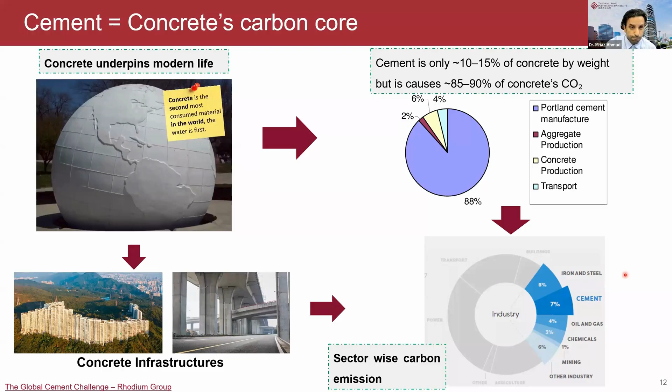Here I have a further breakdown of the carbon footprint from cement and concrete. If we look at a building level, concrete is a major contributor. And if we further zoom into just 1 cubic meter of concrete, we can see that production of concrete is majorly dominated by cement.

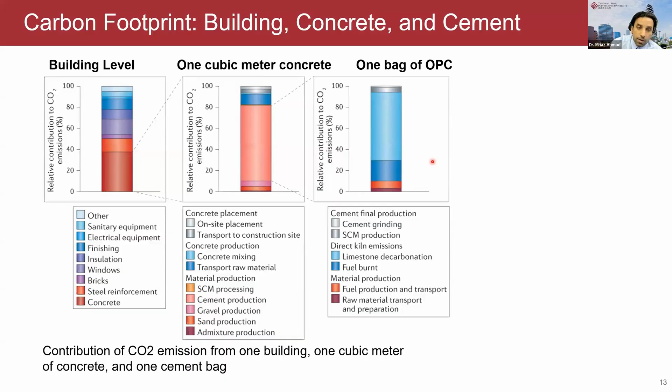And if we further magnify it to 1 bag of cement, we can see that most of the carbon emission from cement comes from calcination, heating the limestone at very high temperature, normally 1450 degrees centigrade. Overall, if we construct a room, around 30% of the carbon emission comes only from cement.

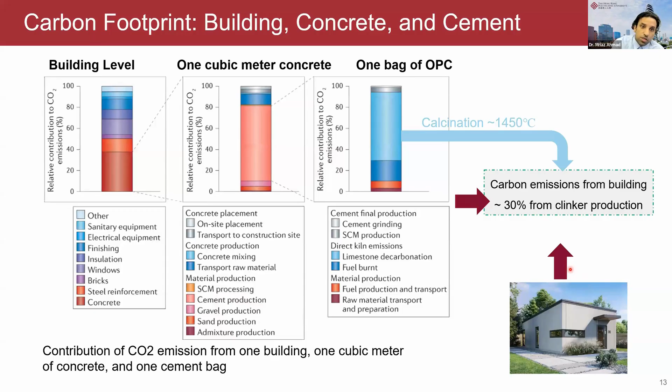Also, the cement production is still growing at a large scale, and mostly it is dominated by China. According to estimates, more than 50% of cement is produced in China alone. So without intervention, it's not very easy to reduce the direct greenhouse gas emissions from cement, and it will continue to be a problem in the future.

So if we want to meet the Paris Agreement climate goals and keep the temperature below the 1.5 degree threshold, then we need to take some actions.

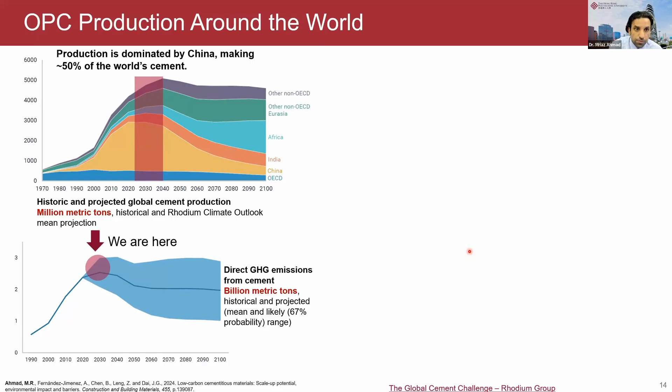So to address the issues in the cement industry, there have been various roadmaps across different regions and countries, such as GCCA and MPA, the Mineral Product Association from UK. GCCA is the Global Cement and Concrete Association. Also Europe has its own, and America and Germany, they have their own roadmaps for how they aim to reduce carbon emissions from cement.

This roadmap contains various strategies such as carbon capture, storage, and utilization. They also focus on concrete efficiency, like how to modify the design of concrete buildings so we can reduce the usage of concrete.

Other approaches are novel chemistries, low carbon cements, like we try to find alternative cementitious materials, not OPC. And another approach is clinker reduction, like we reduce the clinker factors.

Normally, if we talk about supplementary cementitious materials, we use around 10 to 20, 30%, except slags. Of course, slag can be used at a higher percentage. Besides slag, all of the other materials are limited to 10, 20, or maximum 30%.

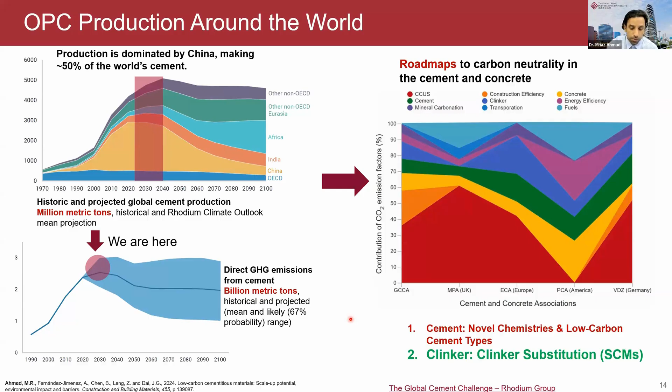So now we'll discuss this. First of all, I would like to talk about low carbon cement and clinker technologies. In the last slide, I discussed two major technologies. One of them is low carbon cement, or the novel cement chemistries. The other one is low clinker cement, like we can reduce the amount of clinker.

So I will briefly discuss a few other technologies which we can use to prepare alternative cement. Some of them include carbonatable binders, ye'elimite cements, belite-rich cement, and alkali activated materials. I'm not going to cover these today. These are different topics, but there's a significant amount of research being conducted also on these alternative cement chemistries.

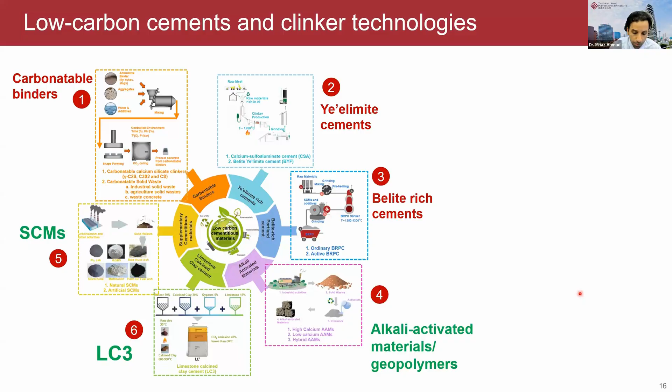Today I'll mainly be covering supplementary cementitious materials and LC3, and how we can prepare ultra low clinker cement using these two technologies.

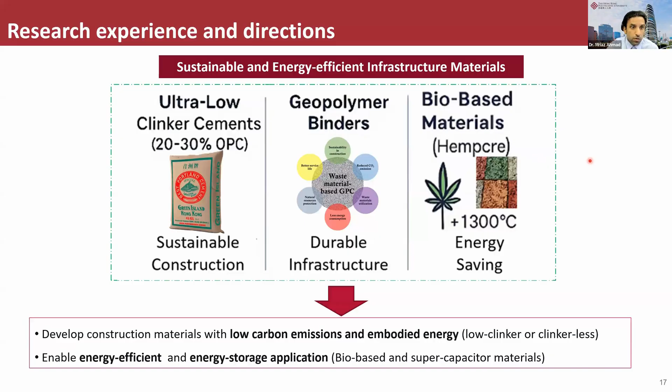About my research, I have recently developed more interest in this ultra low clinker cement, and normally I try to aim to reduce the cement content to only 20 to 30%. I also study geopolymer binders and bio-based materials, which again are not covered in today's webinar.

So what is ultra low clinker cement? Normally, if we talk about low carbon cements, we try to replace supplementary materials by 10%, 20%, or sometimes 30%. In ultra low clinker cement, we try to replace the cement content by 50% or even more.

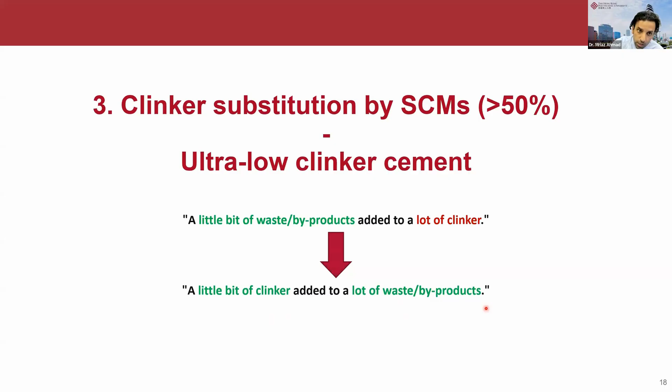So the approach is very simple. Normally what we do is use a little bit of waste or byproduct and add it to a lot of clinker. This is still, of course, a low carbon binder. But in today's webinar, what we are going to discuss is how we can add a little bit of clinker to a lot of waste or industrial byproduct, or so-called supplementary cementitious materials.

But when we replace too much clinker, we encounter several problems. This is not straightforward. There are several issues, one of them mechanical and construction side. We see very slow early strength development, delayed setting time, and workability issues.

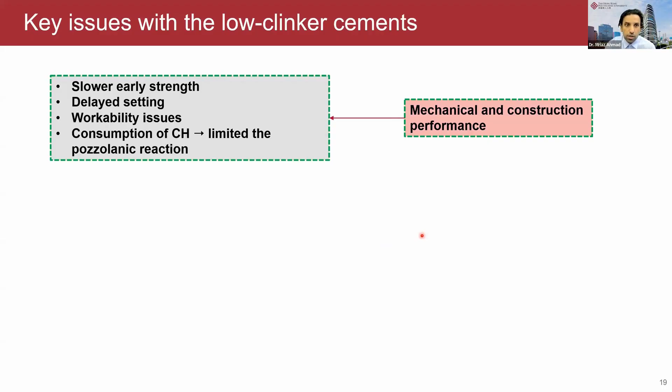This is partly because there is less cement, which generates Portlandite, responsible for the pozzolanic reaction. On the durability side, we also face issues such as when we replace a higher volume of cement with supplementary material, the cement has a very low pH. This reduced alkalinity can lead to problems such as decalcification of CSH because of natural carbonation, or it can lead to more porous structures, which can degrade the long-term durability, very important for concrete.

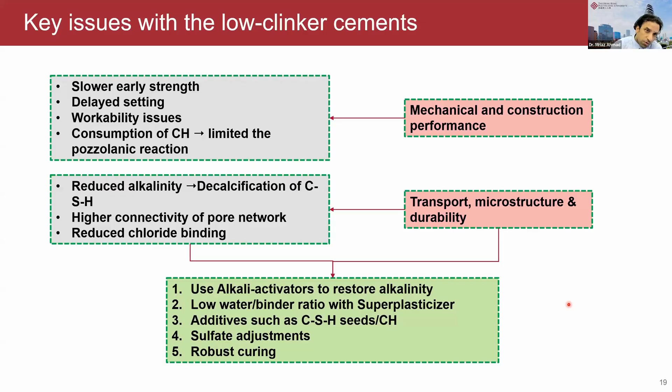My research aims to address this issue while also focusing on preparing ultra low clinker cement through different strategies such as alkaline activators, optimizing water to binder ratios, and using super plasticizer to reduce this water to binder ratio. Also using additives such as CSH seeds, calcium hydroxide, sulfate adjustment, and robust curing. These are the few techniques we can use to prepare ultra low clinker cements.

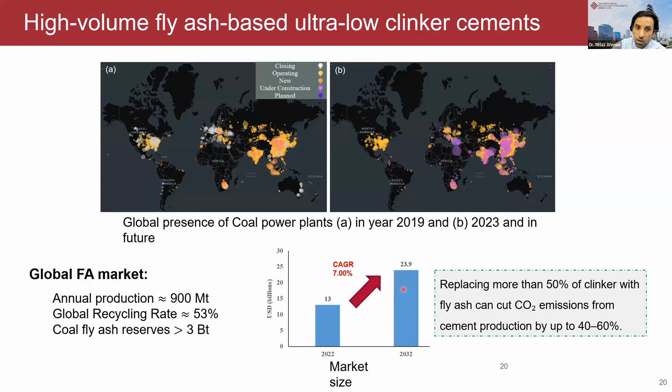So first I tried to use this fly ash to prepare the ultra low clinker cement. In this case, what we did is utilize 80 to 92% fly ash and 8 to 20% clinker only. So we developed the binder.

To make this work, we used sodium hydroxide to boost the reactivity of fly ash, and we maintained a very low water to binder ratio by adjusting the super plasticizer. The main aim was to create a denser structure, since water to binder ratio is extremely important. If we use a high water to binder ratio, after evaporation, it can lead to a porous structure.

And I adopted two curing techniques: one was curing at 20 degrees, the other was curing at 40 degrees. So what we observed is some very technical results, this was done by ICP.

What we did is we pre-dissolved the fly ash into the sodium hydroxide before mixing with the cement. You can see there is a huge boost in releasing silica and alumina. Normally at normal temperatures, if we don't use sodium hydroxide, there will be very little amount of alumina or silica to react. But if we use some amount of sodium hydroxide, it can help release a lot of reactive alumina and silica, which can react with the cement and increase the properties of the cement.

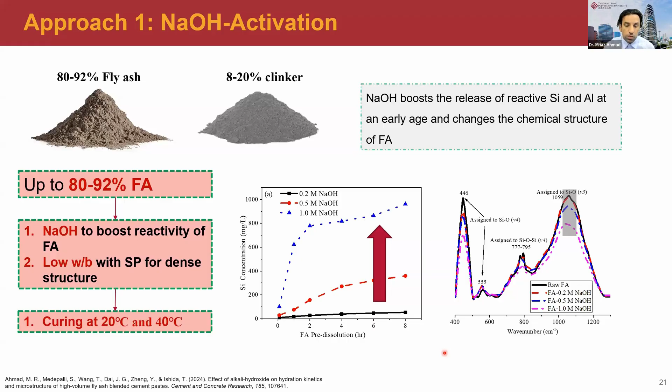This is very crucial to the ultra low clinker cement. Besides that, it can also increase the early strength. The results are quite promising according to our testing. The sodium hydroxide technique significantly increased the early strength from 1.7 megapascal to around 6 megapascal at 1 day, which is more than 3 times. It's a significant improvement in compressive strength, and by 3 days it can reach around 11 megapascal.

At 28 days, we still saw that the compressive strength was still higher, around 35 megapascal. However, the significant increase we observe is at 40 degrees centigrade. So temperature, like I mentioned before, curing is extremely important if we want to improve the properties of this ultra-low clinker cement, because it can boost the further reaction. You can see that when we use this 80% fly ash, the compressive strength can reach 60 megapascal, which is a very high strength, almost qualified for structural grade concrete.

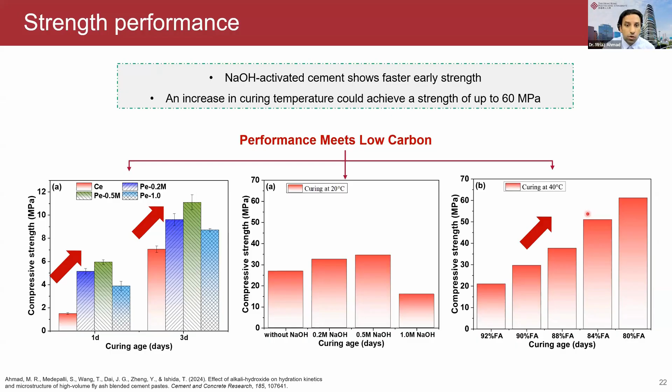So these results prove that we can achieve both low carbon and high performance concrete, even when we are using a very low amount of clinker.

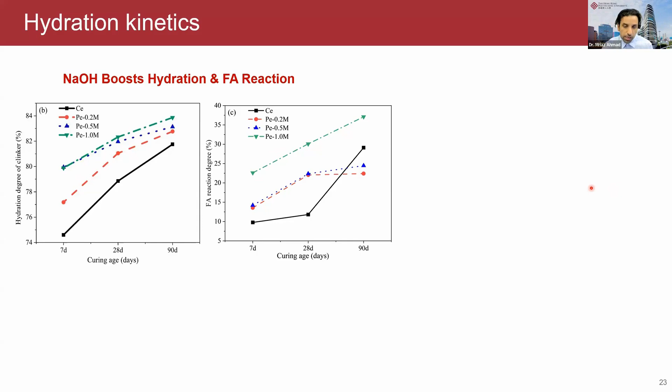So we also studied why this happens and what the fundamental changes are when we use this sodium hydroxide into the system. We observe that two things happen. First, the morphology of the main binding gel, which we can call the glue in the cement, changes a lot when we use sodium hydroxide. The other thing is it also changes the chemical composition, our so-called calcium over silica ratios.

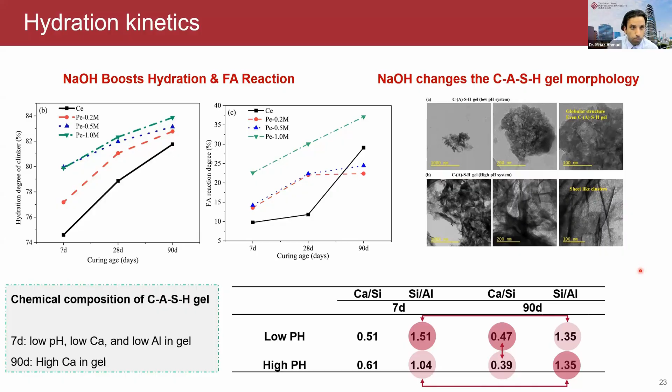So we also studied different durations, for example what happened at 7 days or very early age, what happened at 28 days, or what happened in the long term. What we see is that there are three different mechanisms which evolve.

First is the dissolution when we mix this sodium hydroxide with fly ash. There's a tremendous reaction going on, with a significant release of silica and alumina species. At 7 days, we observed two types of gels: one of them is a CASH gel, and the other one is a C-N-A-S-H gel. But with time, we saw significant changes, and this C-N-A-S-H gel changes to CASH gel.

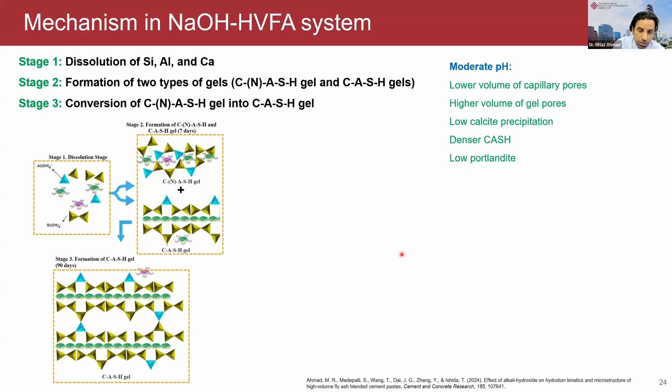We also observed that when we use a high amount of sodium hydroxide, there's a significant increase in capillary pores. So actually, using sodium hydroxide or this alkali treatment is not always beneficial. We have to very carefully optimize the optimum content of this sodium hydroxide. If you see these blue channels, they represent capillary pores, and they are much wider compared to these figures on the left side, which shows that capillary pores are much lower here.

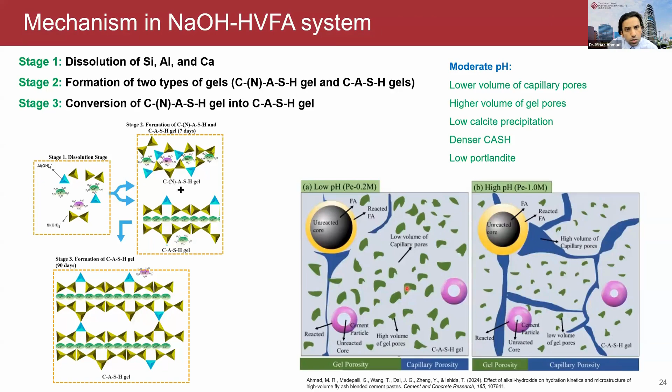So this was the first approach. Now I will be discussing the second approach.

In the second approach, we studied another promising low carbon cement system, known as the limestone calcined clay system. There's a tremendous amount of research going on for this particular binder in a significant part of the world. Particularly, this binder is already being utilized in India, also in Cuba, and in a few countries in Africa because of its lower carbon emission. Also, this binder can be significantly scaled.

Typically, when we talk about LC3, we are talking about LC3-50, which means we are replacing up to 50% of the cement with limestone and calcined clay. This cement has almost 40% lower carbon emissions.

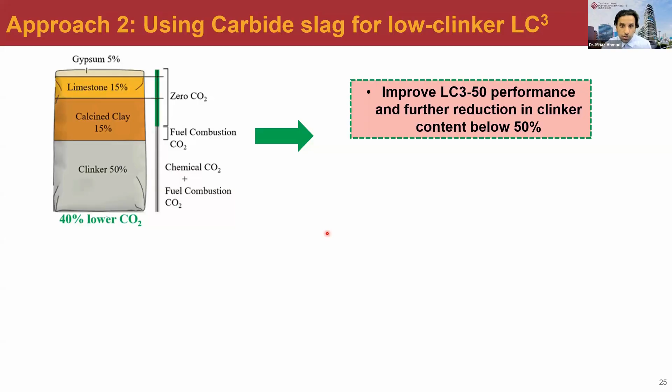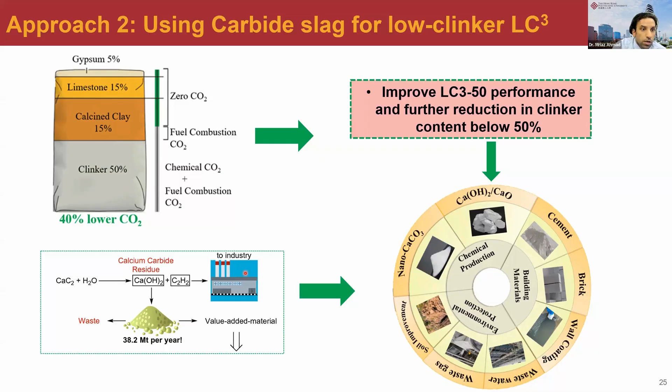So the goal of my research was to further reduce the amount of clinker in this system. The problem is that when we want to further reduce the cement, the reactivity of this calcined clay cannot be fully utilized because there is not enough or sufficient calcium hydroxide. So we tried to find some industrial waste which can supply calcium hydroxide, and we found that carbide slag is a perfect candidate.

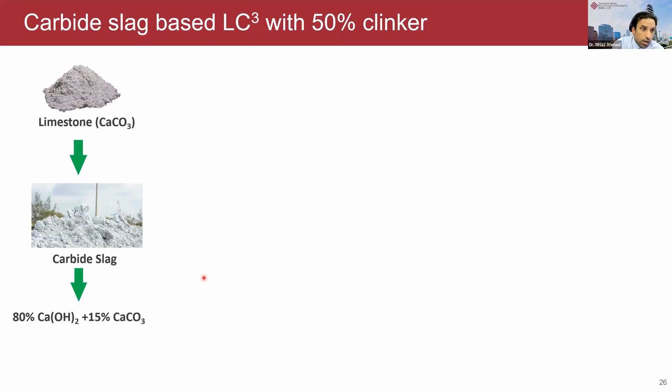This carbide slag has 80% calcium hydroxide and 15% calcium carbonate, or calcite, so it is a source of highly reactive free lime. We compared the LC3-50 with limestone against a new mix, which we call LC3-CH, because this carbide slag provides additional portlandite or calcium hydroxide. So all other mixtures are called CH.

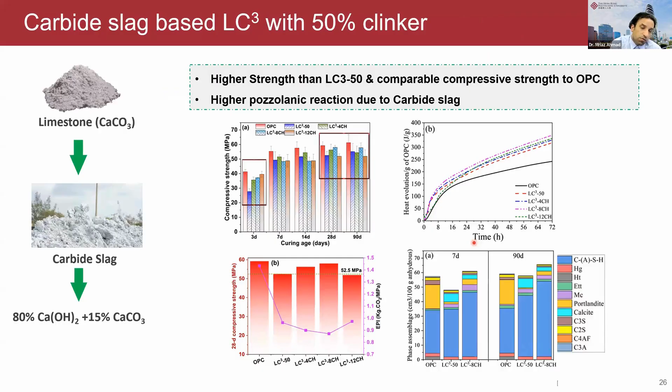That was the system when we replaced only 50% clinker. In the next approach, we created LC-Cube mixes with only 40 and 30% clinker content, and we tested two sources of carbide slag. One is just the raw carbide slag, which has a lot of calcium hydroxide. The other, we tried to calcine this calcium carbide slag to produce quicklime or calcium oxide. The idea was that this calcium oxide has very high heat during the early reaction, and it may boost the early age compressive strength.

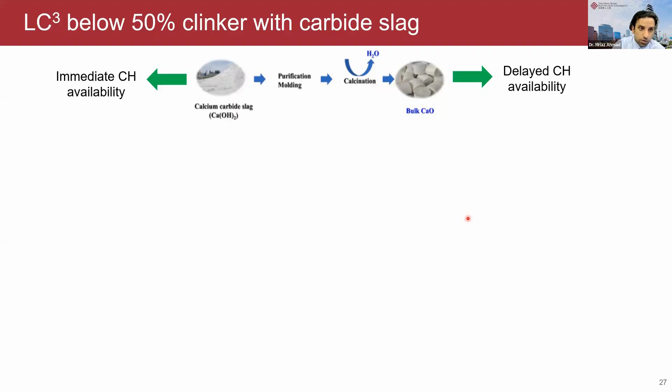The lower the EPI, the better the material. At the same time, it can maintain the same compressive strength as LC-Cube 50. Also, as compared to LC-Cube 50, it significantly improved the reaction of the system.

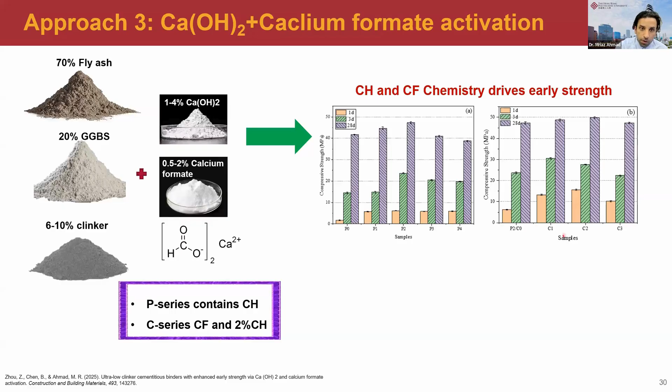So in further optimization, we added some calcium formate. We could see that at 1 day, we could achieve a compressive strength of 15.7 megapascal, which is a significant boost, given that the clinker content is only in the range of 6%.

So why and how it happens, we further tried to study the different mechanisms. We propose 3 different mechanisms which happen in this kind of system. The first one is that the calcium formate aggressively accelerates the clinker hydration, and increases the hydration of the clinker at a very early age.

The second mechanism is a substantial increase in the volume of the CSH gel, because we also have 20% slag, calcium hydroxide, and calcium formate. By improving the hydration of the clinker, this system can also increase the reaction of supplementary materials such as slag and fly ash, because there's a sufficient amount of calcium hydroxide available.

The third and last phenomenon we observed is a high volume of calcium carbonate, or in situ carbonation, which forms very tiny calcite particles that can fill the pores and densify the microstructure. These observations were confirmed with TGA and XRD. At 28 days, compared to the control mixture, there's a huge increase in the intensity of the calcite mineral.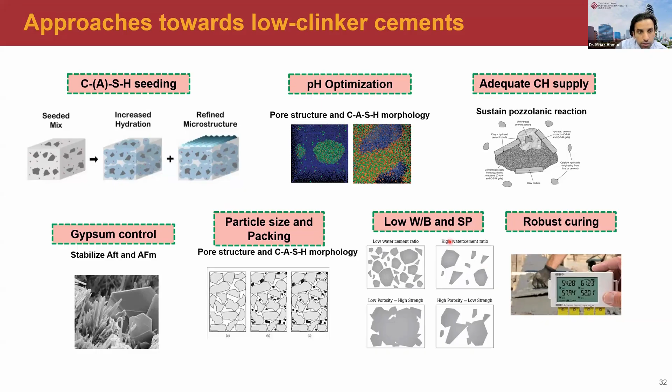However, we did not cover this topic in our recent research. We also did not study CASH seeding, but these are techniques reported in the literature to boost strength—they have not yet been applied to study ultra low clinker cement. Not a lot of research is available. We also studied low carbon, low water-to-binder ratio, and robust curing. These are the different techniques we can utilize to produce ultra low clinker cement.

A critical question, however, is whether we have enough supplementary cementitious materials for the global transition. The good news is that there is a vast and diverse range of potential supplementary materials.

There's also a huge amount of other supplementary materials such as phosphogypsum, waste concrete, mine tailings, and coal gangue. The volume of generation of these industrial byproducts is actually much more than the requirement of the cement industry, so it just needs a lot of research.

Of course, there's already a lot of research going on, which means we can utilize these large volumes of supplementary materials available to produce this kind of low clinker cement. However, not every material is as good as fly ash and slag, so there's a significant need to invest in research to study the properties of these supplementary cementitious materials.

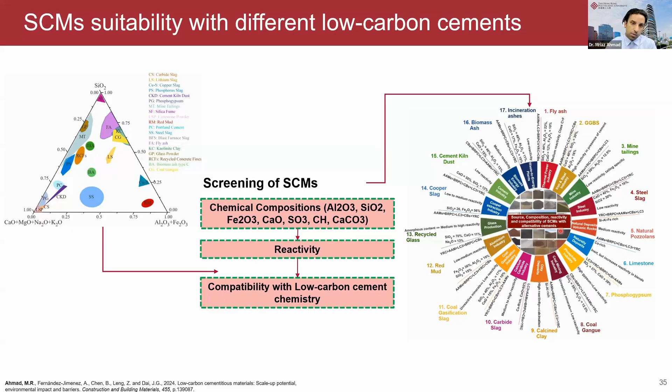Of course, some information still needs to be upgraded, because supplementary cementitious materials, even when from different sources, may still have different reactivity and different chemical composition. So this is still a very preliminary guideline, but I think using just this simple picture we can very quickly determine which kind of material is suitable for which kind of binder.

Supplementary blended cement and LC3 are commercially ready and being used in several parts of the world, and they offer significant savings depending on the replacement level. In our study we go up to 80, even more than 90 percent, meaning it can reduce not only cost but also environmental or carbon emissions.

However, there are significant technical barriers. Especially for ultra low clinker cement, it's not a wide practice around the world at this moment. Alkali activated materials and novel clinkers such as CSA have a significant amount of research ongoing, and in a few countries they're already being used. Very recently the UK approved their standard for alkali activated materials, and it's also in application in Australia. But these materials face greater challenges, not only with cost but also with supply chains, and these new binders lack long-term data and standards, which is very important.

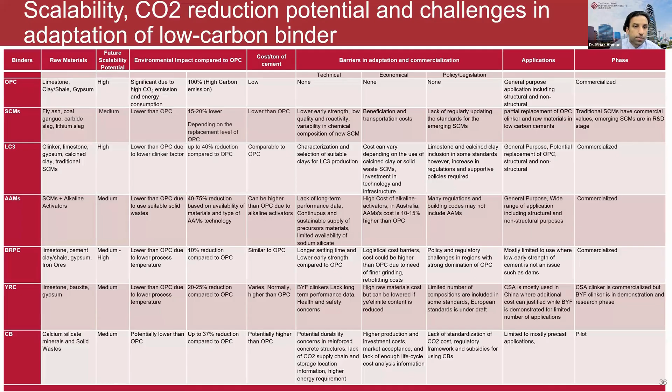With that, I will conclude today's webinar, and thank you very much for your attention. I will be happy to take any questions.

From YC Lam, there are two questions. The first one: comparing sodium hydroxide, fly ash, and GGBS, which one comes with the required early and ultimate strength, at lowest cost and highest quality control, in terms of source and quality of additives that may affect it? Thank you.

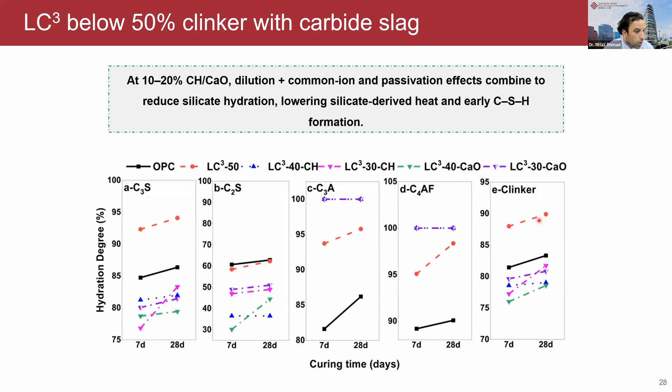Sorry, can you mention the slide? Mr. White, can you repeat the question again, otherwise? Okay—comparing sodium hydroxide, fly ash, and GGBS, which one comes with required early and ultimate strength at lowest cost and highest quality control?

Yeah, okay, so first of all, GGBS or slag provides early strength. However, GGBS I assume is more expensive than fly ash, and the reaction rate of fly ash is much slower. So actually there has to be a balance—if we want to achieve high early strength but also be low cost effective, I think we need to use a blend of these materials, which is actually what we have done, especially when using calcium formate and calcium hydroxide.

So we saw that we can increase the strength up to 15.7 megapascal. I think if we want a very high early strength, GGBS could be a good material, but there could be a problem of thermal cracking because of the high heat evolution. So it will be very beneficial to use some amount of fly ash, but it has to be optimized. I think there is no single answer because fly ash does not give early strength but is cheaper, and GGBS gives early strength but is more expensive.

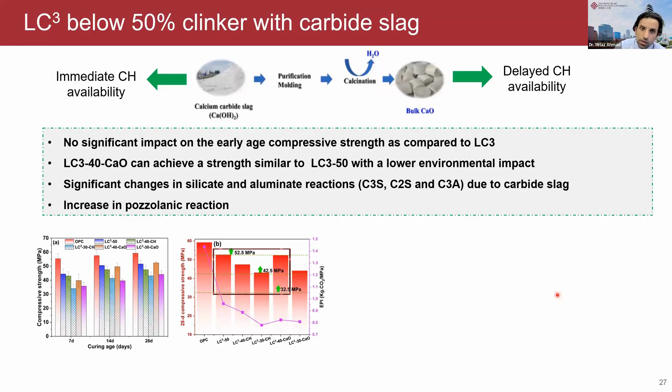I think if we are talking about industries, like I mentioned in the last slide, one of the most carbon polluting industries is coal power production. We have discussed a wide range of supplementary materials, not only fly ash. We cannot close all the industries, and some industries are not very high polluting, such as glass production. So there are significant amounts of these waste byproducts available, such as glass powders, which actually have quite a good amount of reactivity. I think it's very possible to replace or use these kinds of supplementary materials from these kinds of industries.

Thank you. And any byproducts from green energy production, can they help to apply low carbon concrete?

Any byproduct, I think not necessarily. It depends, such as we try to use this carbide slag, but it depends how much you are using and what is the source of this industry. Talking about fly ash again, because there's a lot of criticism going on that we need to shut down these coal power plants. Although this fly ash increases the strength, I'm trying to address the earlier question, because it comes from an already carbon intensive industry, so it does not make as much sense. But other industries such as carbide slag, this byproduct provides us calcium hydroxide. If we want to look at commercial calcium hydroxide, it is extremely carbon intensive - it produces 1 kg of carbon dioxide emission for 1 kg produced. But this carbide slag is very useful. So I think it can vary from byproduct to byproduct, but in general, in most cases, it will reduce the carbon emission and lead to a green product.